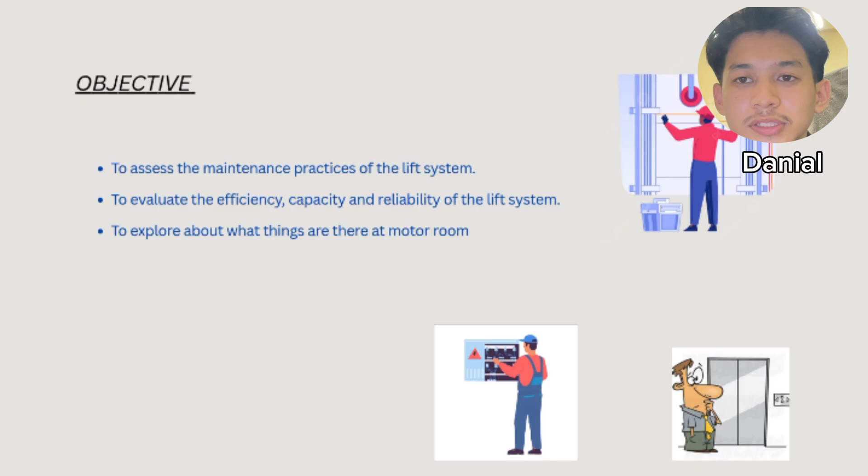Chapter 1, introduction to lift and elevator. The objective of this case study is to assess the maintenance practice of the lift system, evaluate the efficiency, capacity and reliability of the lift system, and lastly explore what things are at the motor room.

That's all from me, we move to chapter 2, introduction of case study. The case study is located in Precinct 4, Putrajaya. It serves as the main office for the Ministry of Agriculture and Food Security. It has 18 floors and is a corporate building type. We move to the second part, project background.

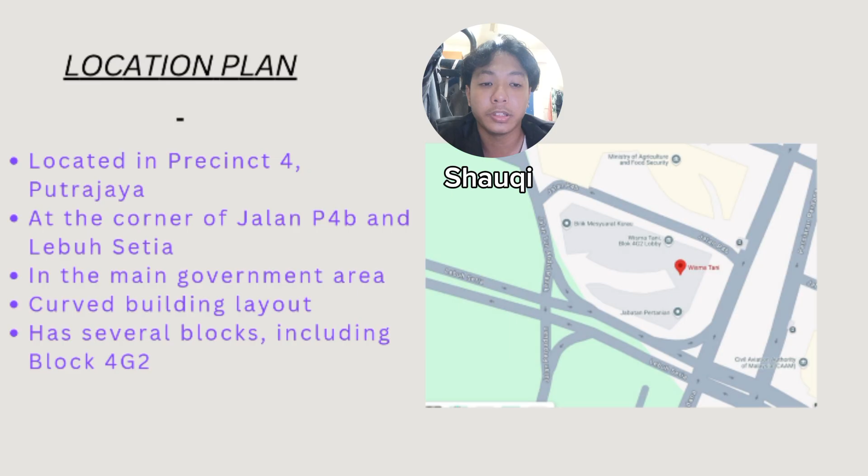We move to the last part, location plan. This building is at the corner of Jalan P4B and Lebuh Setia. It is in the main government area and the design of the building has a curved building layout. It has several blocks including block 4G2. That's all for me, thank you.

Chapter 3, literature review. In literature review, we have the type of system. The type of system at Wisma Prism 4 in Putrajaya is a traction elevator system. The traction elevator system has a lot of advantages. At Wisma Prism 4 Putrajaya, they use a traction elevator system which uses ropes and counterweights pulled by a motor in the motor room. This type of elevator is suitable because the building is an 18th floor corporate building, since it's a government building.

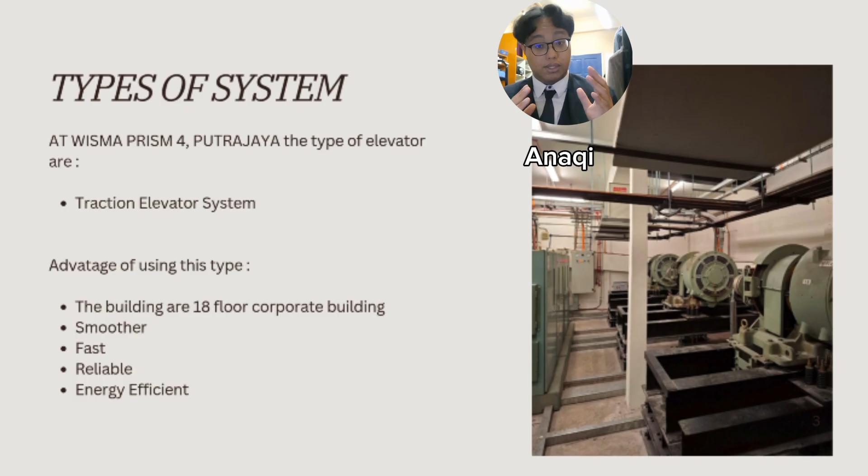Next is the components of the system. The first component is the traction sheave or traction machine. The traction machine is a vital component in the traction elevator system that functions as the main driving unit, acting like a motor that drives the car lift that transports people inside it. In a traction elevator system, there are two types of traction machine: geared or gearless, depending on the requirement needed. But in Wisma Prism 4, the elevator in Putrajaya uses a gearless electric motor that spins the traction sheave to control the car lift. The advantage of using the gearless motor is that it's more reliable and much smoother.

Next is the braking system. The brake system is attached to the traction machine and holds the elevator in place when it's not in use or moving, and when the power has failed. The brake system has brake calipers that create friction with the brake disc to stop. Just like a car, when it's moving and you press the brake, the car stops because of the brake system and brake calipers that press, like a sandwich, between the brake disc. Similarly for the lift, when it's moving and wants to stop, it creates friction.

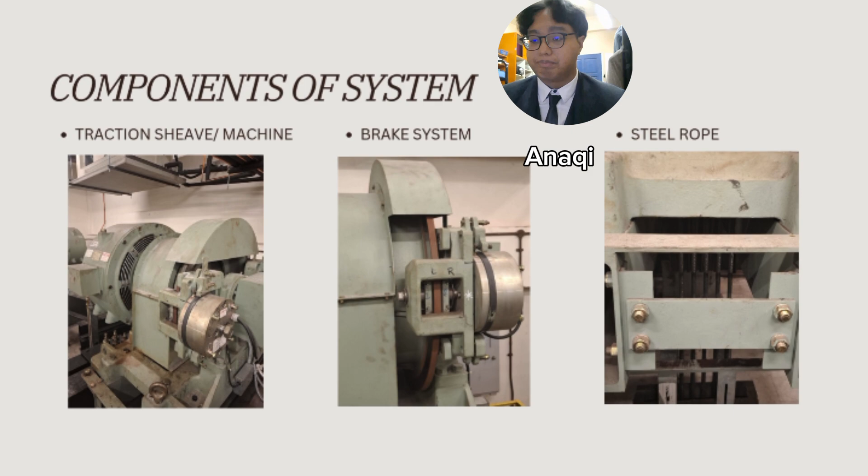Next up is the car lift. The car lift is specifically designed by Hitachi to transport passengers or goods vertically within the building, safely and comfortably. It acts like a car, hence the name the car lift. If you want to drive, you have to be in the cabin, and the cabin must be safe, right? Same goes for the lift, to transport people.

The type of car used in Wisma Prism 4 is a passenger lift car, since it's a corporate building that is frequently operated by people, and is more convenient, fast and cost effective.

The last but not least is the door system. Lift doors require a lift entrance which has 2 sets: a car door fitted at the car lift, and a landing door. There's the cabin and the cabin door like this, and then another door outside at the landing floor. That is a safety feature, to make sure the passengers are safe and comfortable to ride the elevator.

The landing doors must be made of incombustible material, such as a steel sheet over a light steel framework of about 30mm overall thickness, to reduce fire risk, like a 1-hour fire door.

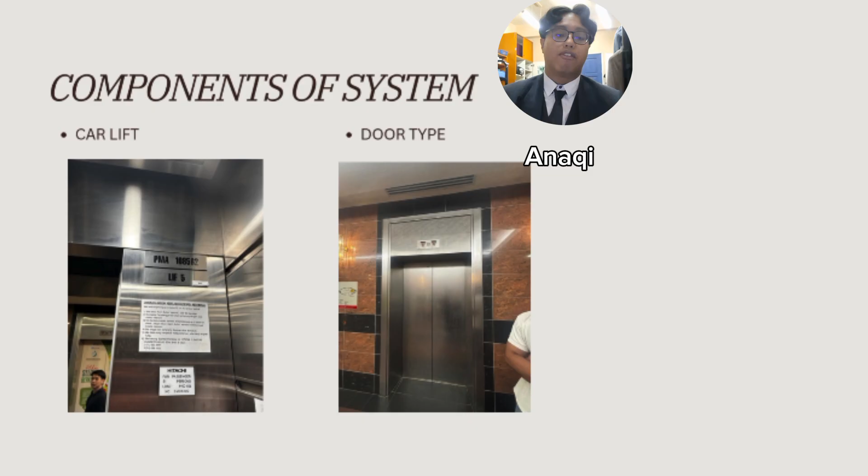Operation system. What is the operation system that we use in our case study? The operation system included in our case study is the traction electric motor room system. It uses traction or electric lift system. The motor room is located at the top floor, above the lift shaft.

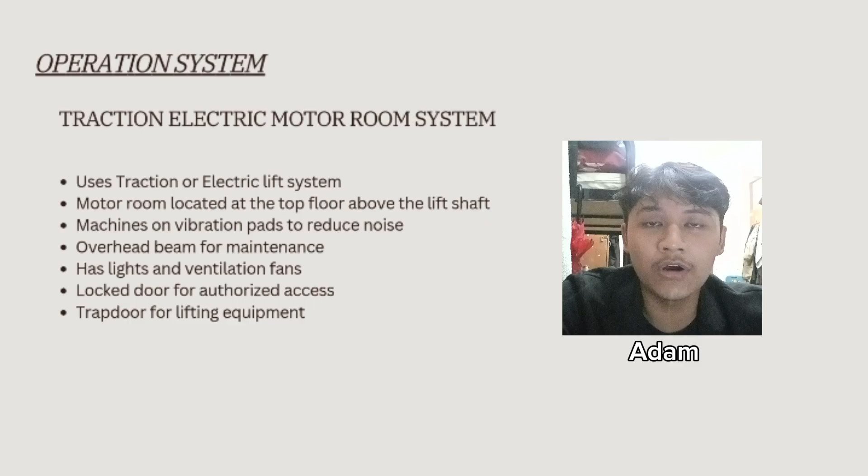The machine sits on a vibration pad to reduce noise. There's an overhead beam for maintenance, light and ventilation fans, a locked door for authorized access, and also a trapdoor for lifting equipment.

This system requires all of these items to function. First of all, we need a machine room located at the top of the building, holding key mechanical and electrical parts. Second, it needs an electric motor, which powers the lift by turning the pulley, converting electricity into motion. Third, we need the traction sheave pulley, a grooved wheel that moves the ropes or belts to lift or lower the elevator. Fourth, steel ropes or belts loop over the pulley and connect the elevator car and counterweight.

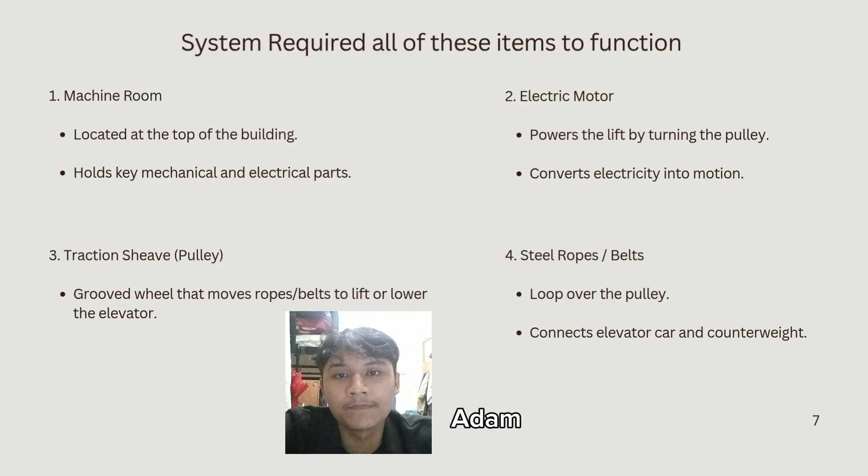Sixth, the control panel system controls lift direction, speed and stops, taking commands from buttons and sensors. Seventh, guide rails track on the shaft walls, keeping the elevator and counterweight moving straight and safely. The braking system stops the lift when the motor is off, and it also gives an emergency brake if the speed is abnormal.

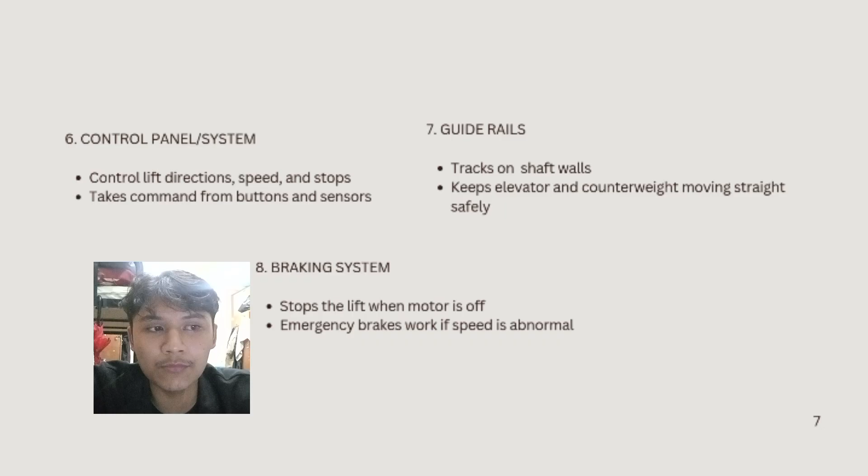Conclusion. With our observation of the traction lift system of Wisma Tani Putrajaya, we learned a lot of valuable information on how the elevator works, such as how the system integrates into the overall building design, how the system manages to save energy by using a counterweight, how the type of elevator chosen suits well with the purpose of the space planning, and how regularly they maintain the elevator to keep it in perfect condition.